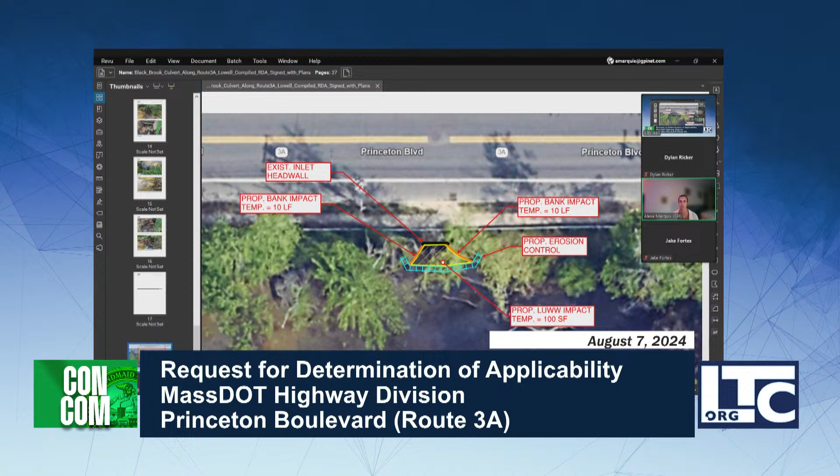There's a couple other photos. As you can see, there's like an umbrella in there, it's in pretty rough shape. Here is just a small markup of what we would be doing for work. There would be temporary impacts to bank and land under water just so we can remove the debris that's there, but it would not consist of any type of dredge or fill.

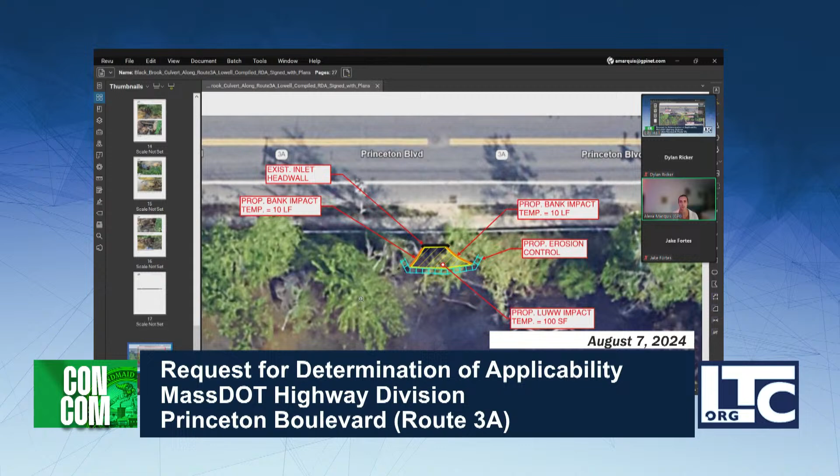I'd like to open it up for questions if the commission has any. Sure, there's a bunch of dead wood laying near that grate, will that be removed during construction? Yep, any of the debris that's gotten up in here, and this as well, that would all be taken out just so we can establish some better conditions for this culvert.

And what machinery would you be using, do you know? I would think probably a small excavator just to get anything out, and it would be up on the roadway. The plan seems reasonable to me. Any other questions?

A motion? I'll make a motion to grant a Negative 3. Second, I'll second it. All in favor? Aye. Aye. Aye. All right, thanks for your presentation, and good luck with your project. Thank you very much, I appreciate it.

Next up, we have a notice of intent from the Markley Group. Project location 2 Princeton Avenue, 1 Markley Way. A notice of intent has been filed by the Markley Group to install new generators and utility infrastructure within the 100-foot buffer zone of a protected wetland.

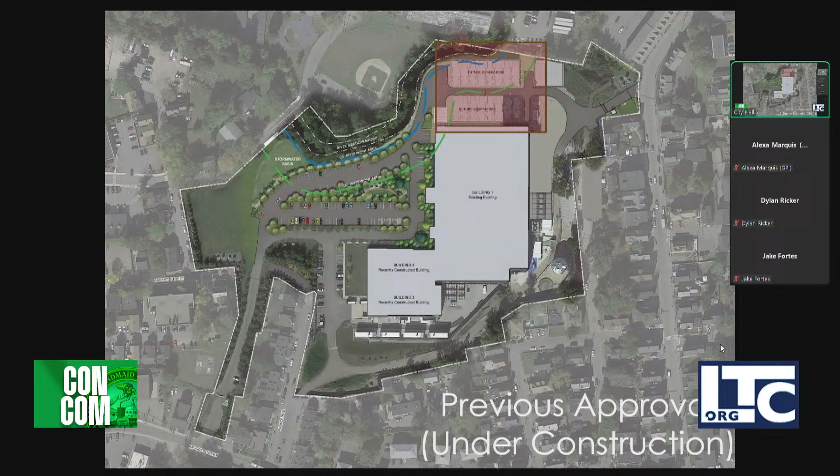If you go to the next slide. This was previously shown with dashed lines that said future generators, because we didn't know at the time what exactly they would look like or what their exact dimensions were, but now we do.

So we did submit this filing that shows there are 2 existing generators, shown in the aerial on the bottom right corner of the plan. And then there are 18 additional total proposed generators going within the south side of the road and the north side of the road within that wall that's under construction.

And 2 of those generators will actually sit about 5 feet higher. That's the area that you see on the right. There is an extension of that previously proposed retaining wall, so there will be 2 additional legs to support those 2 additional generators that will be set up higher to match the elevation of the roadway.

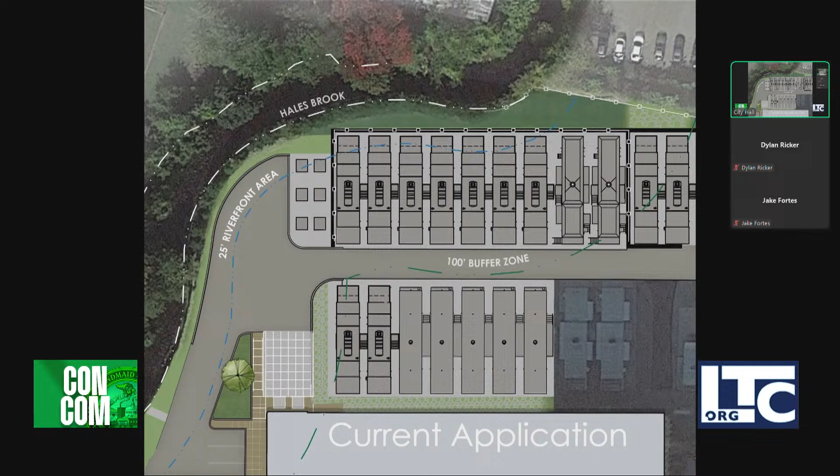If you go to the next slide, this is the site prep plan. As we mentioned in our filing, there is some utility infrastructure work that needs to be done here.

We did a pre-construction CCTV of the existing 30-inch RCP culvert, which takes most of the drainage from the site and goes out through the river wall to Hales Brook. We did observe on that pre-con video that there was a sizable crack along the top of the pipe, so that needs to be repaired.

This is more like maintenance type work, but as we're repairing it, it sits on a diagonal today, and we're going to straighten that out so that it runs directly between generators rather than diagonally across and below one of them. So you'll see that here.

We show some caps and abandonments, and there's more detail on that on the utility plan.

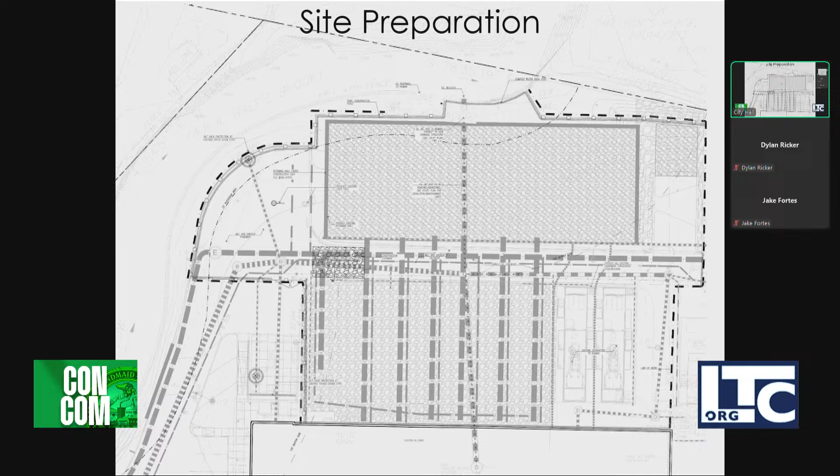If you go to the next slide, this is just a copy of the layout plan that was included in the submission. It's consistent with what you saw in the rendering, but there are some switch boxes on the left, generators in the center, and then that additional retaining wall off to the right side.

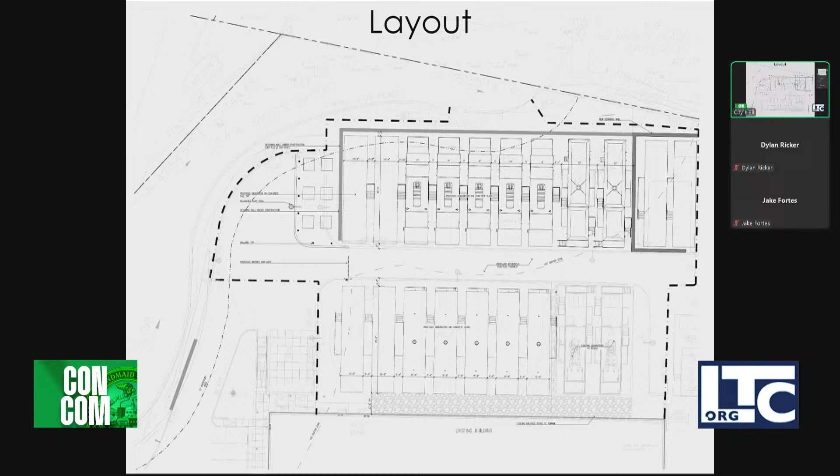On the next slide you have the utility plan. You'll see the 30-inch RCP replacement running parallel between 2 generators, and then you'll also see a second line. That's kind of like a belt and suspenders approach, if anything were to ever happen, to try to minimize any ground disturbance or impact to the generator in the future.

We are not increasing any flow. The flows are still the same as the previous approval. This is just like in case of emergency, as an overflow line.

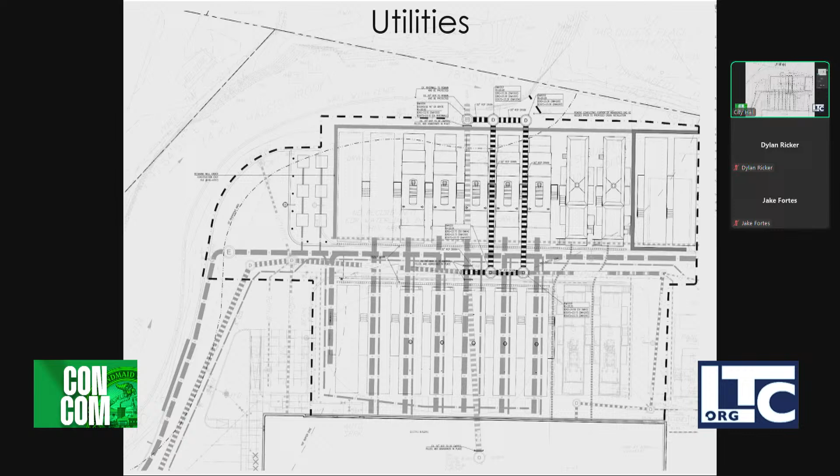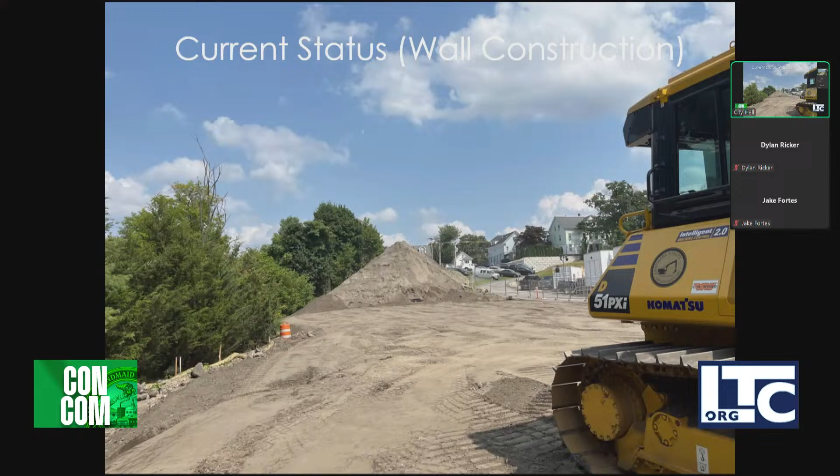On the next slide, you'll see a refresher of what the site looked like when the Markley Group acquired it in 2015. And then on the next slide, we have a picture of what it currently looks like today, where the site enabling and grading work is happening in preparation for the retaining wall installation under the previous approval.

So with that, I will open it up to the commission for any questions or comments. Thank you.

Most of my concerns about this project are in prior decisions. I am definitely concerned about adding two more structures right at the edge of the brook. Typically, we consider the 25-foot line to be a no disturb zone.

Yes, so those additional two are just within the 100-foot buffer. They're actually kind of past where the brook takes a bend, but I definitely acknowledge the concern.

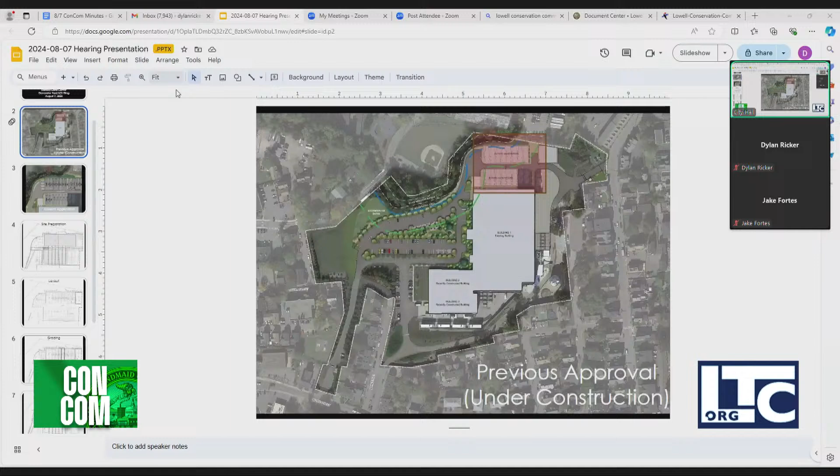If you go to the next slide, Dylan, I think that's the clearest view of where the 25-foot offset and then the 100-foot buffer is.

It looks to me like DMH 202 and 203 are within the 25-foot. Oh, the drainage structures, yes. I was talking about the additional generators, but these structures, yes, are within the 25-foot.

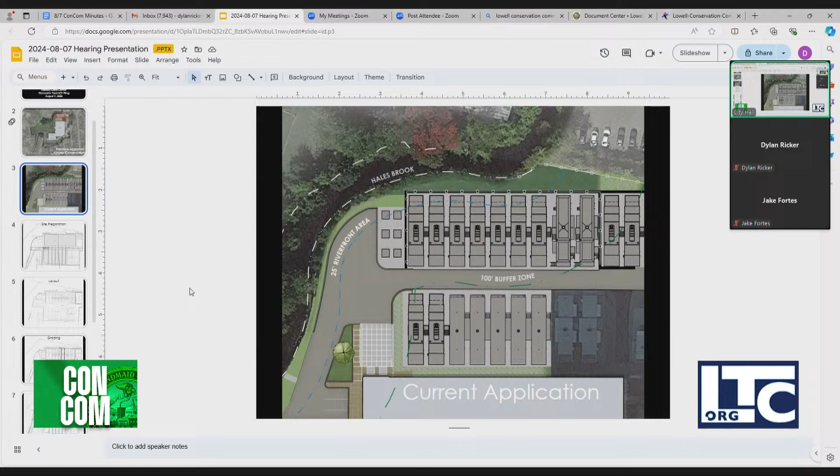I certainly understand the need for, or the desire for an overflow structure in case there is some maintenance work that needs to be done, or a clog or something. And I suppose that adding one is no better than adding two is no more damaging than adding one.

But I'm really hesitant. This is something that we typically would not allow. I can understand that maybe now under construction might be less damaging than in the future without machinery there. But I already feel like we've given you more space inside the 25-foot buffer than we should have.

I mean, anything inside of the retaining wall, to me, is a non-issue. We've allowed it. And I'm kind of undecided about how to feel about this. Anybody else from the board?